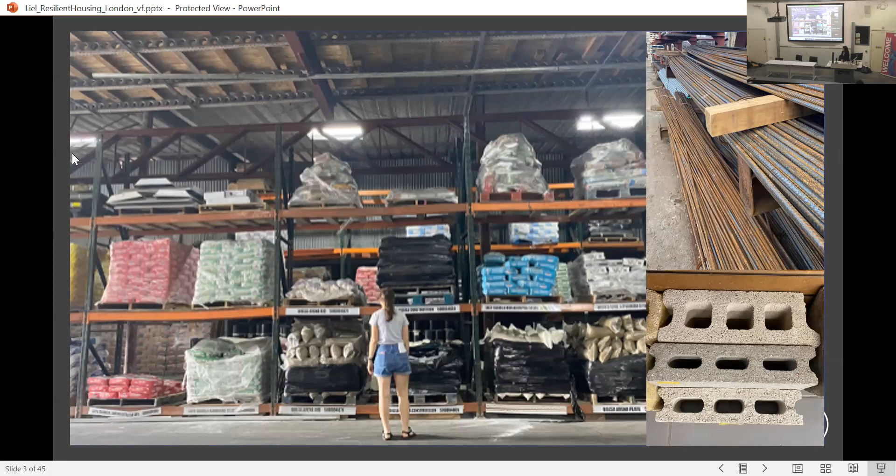There's also wide variation in material properties. This is a hardware store in Puerto Rico, which I'm going to talk about in this presentation, but there's lots of variation in what you can find, what you can build with. As a result, no two houses are the same. So in order to think about disaster resilient housing globally or across a community, we have to be able to deal with these uncertainties in what's there and how it's been built.

Housing is also probably the least disaster resilient form of infrastructure. We have lots of problems with infrastructure and disaster resilience, and housing is very problematic. Millions of people every year lose their houses and are displaced due to disasters - earthquakes, climate related things, other things.

This is a picture again from Puerto Rico. The roof was lost in Hurricane Maria - I'll get to a history of Puerto Rico in a second, but that was in 2017. The building was then red tagged - that's what the red X means - in the early 2020 earthquake. So you can see there's a recovery challenge here, where the roof had not been repaired at the time the earthquake happened. This picture was taken in February 2020, and this home was vulnerable both to hurricanes and earthquakes.

This is the problem we want to take on. This is not a good outcome for individuals, it's not a good outcome for the community. So what can we do about this very tricky problem of houses that do not perform well in earthquakes and other events?

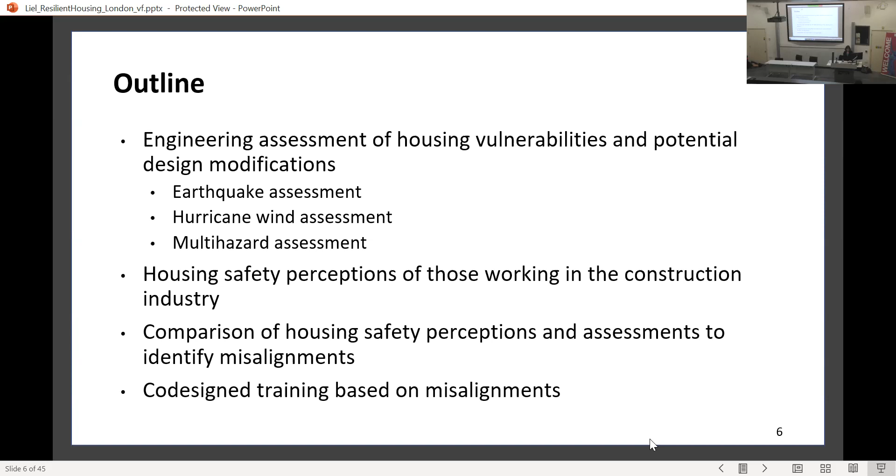Just quickly to acknowledge that the work I'm going to present is the work of a team involving multiple colleagues, a group of amazing students, undergraduate and graduate, and we have been working all over the world. I'm going to present work today on Puerto Rico, but I'm happy to be the voice presenting the amazing work of all of these people.

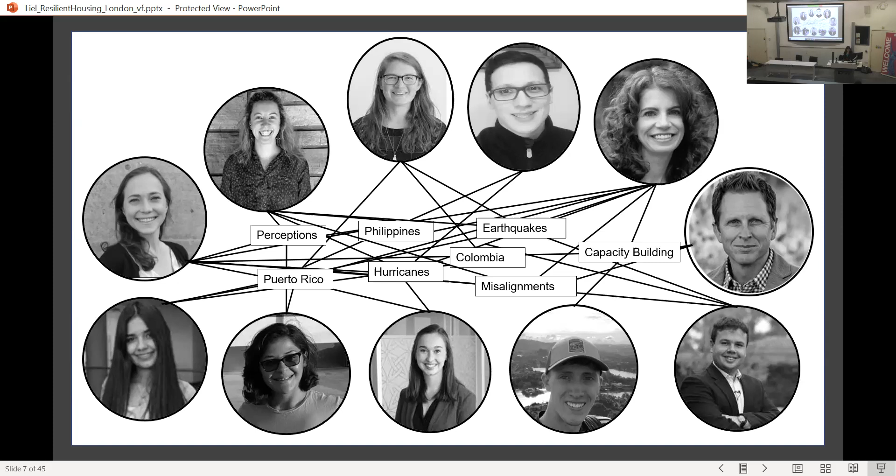Puerto Rico is an American island in the Caribbean. It's technically a territory, which means it has a complicated relationship with the rest of the U.S. It was damaged by Hurricanes Irma and Maria in 2017, which occurred in quick succession in September and damaged more than 1 million houses, about a third of the total houses on the island. Puerto Rico was also extremely damaged by Hurricane Fiona, which hit in September of this year.

So this is a hurricane-prone region, and that's one of the important pieces of context for Puerto Rico. They also experienced in 2019 and 2020 their first major earthquake since 1918, which damaged and destroyed over 10,000 houses. If your Caribbean geography isn't awesome, it's not that far from Haiti and other islands in the Caribbean that have very high seismicity.

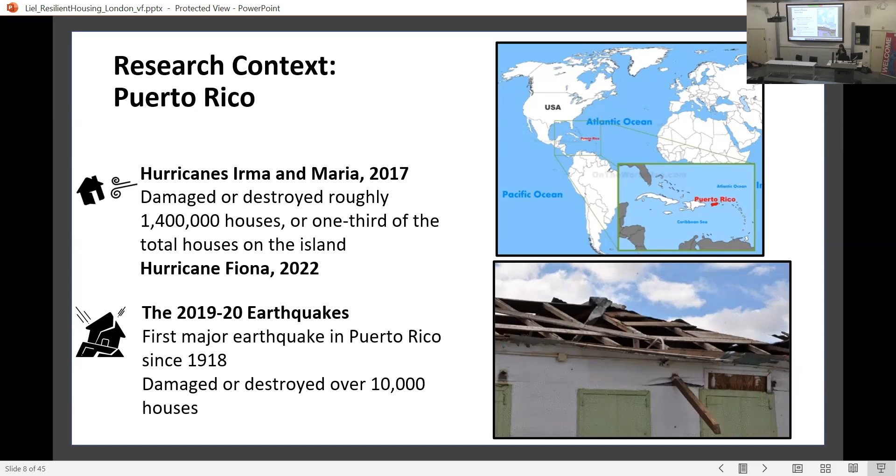Let's start with the engineering side of things. Actually, let me go back for one second. Other context for Puerto Rico: the island has a lot of debt, complicated economic situations, and employment issues. There's a lot of unemployment and a lot of out-migration to the mainland United States. All these things are contributing together to challenges around housing and safe disaster resilience.

As promised, I'm going to start with the engineering, and I'll start with reinforced concrete houses. Here are three pictures of reinforced concrete houses in Puerto Rico. They are mostly reinforced concrete frames with concrete blocks, usually built as infill. They are one or two stories and typically built so they can be expanded upwards in the future.

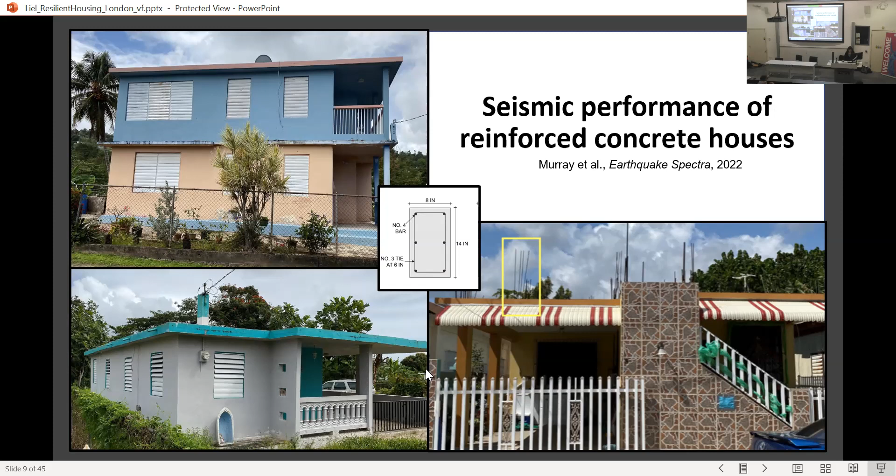It's easy to find pictures that look basically like this. The spacing between columns is pretty similar, and everybody uses concrete blocks from the same manufacturer. So even though there's a lot of variation in what they look like, overall it's not that much variation compared to houses in terms of engineering details. And of course, they're not really engineered - they're built by community members usually, and they have typical dimensions. Apologies for the American dimensions, but that's how we still build.

So what we did is create a list, or a set, of 50 archetype reinforced concrete houses. The student who worked on this was Pauline Murray - she's now a postdoc at University of Alaska. We created models of 50 different houses, and the variations looked at cases that varied in terms of concrete strength.

This is an environment where there's a wheelbarrow of sand, and things are mixed by hand generally. So there's wide variation in concrete strength, and it's probably low. We looked at variation in how many reinforcing bars, the transverse reinforcement, the thickness of the slab. It's very common to put pipes in your columns, so that's what the cross section one is. We looked at the effect of rebar corrosion in a very salty environment left exposed for a long time, and we also looked at the effect of retrofit.

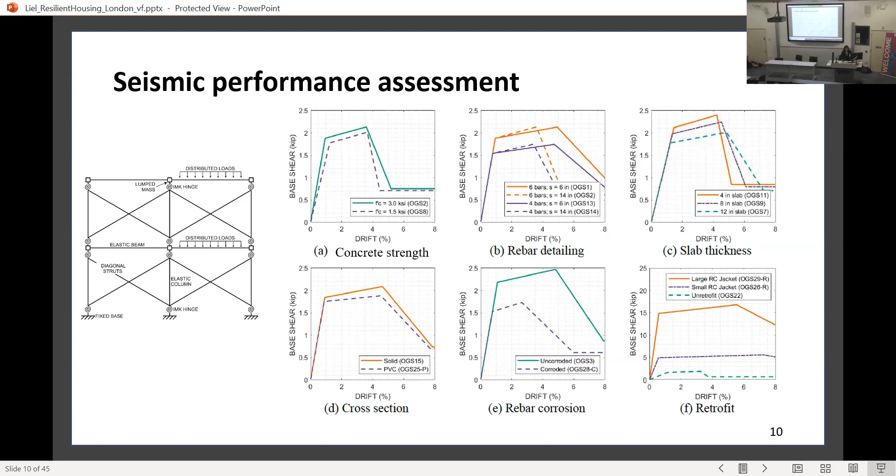For each of these, we created a nonlinear simulation model using OpenSees, and then assessed the performance of these houses. To do the assessment, we did incremental dynamic analysis - we have a set of ground motions, and we scaled those ground motions up and up until something happened. The primary metric I'm going to use today is a collapse fragility, shown on the right here: probability of collapse as a function of ground motion intensity.

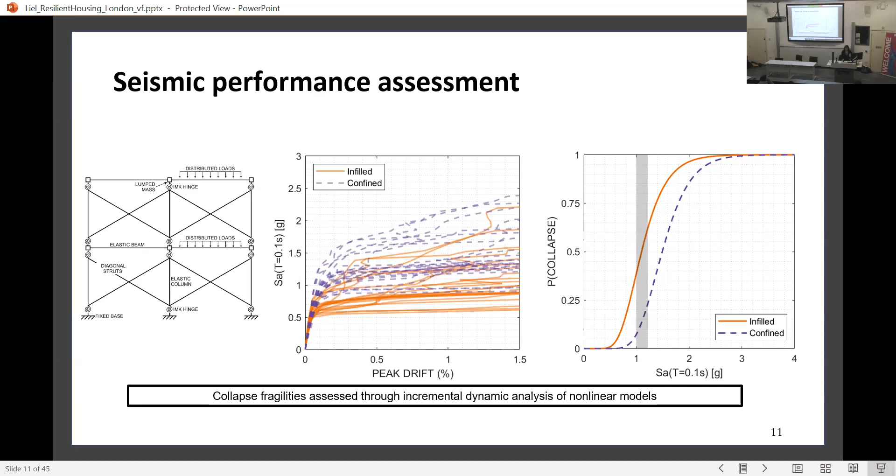One of our findings was that these open ground story houses are the most vulnerable. On the right is all of the collapse fragilities we generated for all the cases we looked at. The ones with this open ground story are shown in orange, and those are the most vulnerable. This is completely consistent with damage in the earthquakes from a couple years ago, where we find that buildings with these relatively spindly, not very well reinforced columns, and a rigid block on top, saw quite a bit of damage.

So the first thing is that these houses are going to present a particular challenge in an earthquake environment. Now obviously there's a reason people build this way in Puerto Rico - partially to park your car underneath, but partially because they have a fairly big flood risk. We'll come back to that in a second. The solution cannot necessarily be to not build an open ground story.

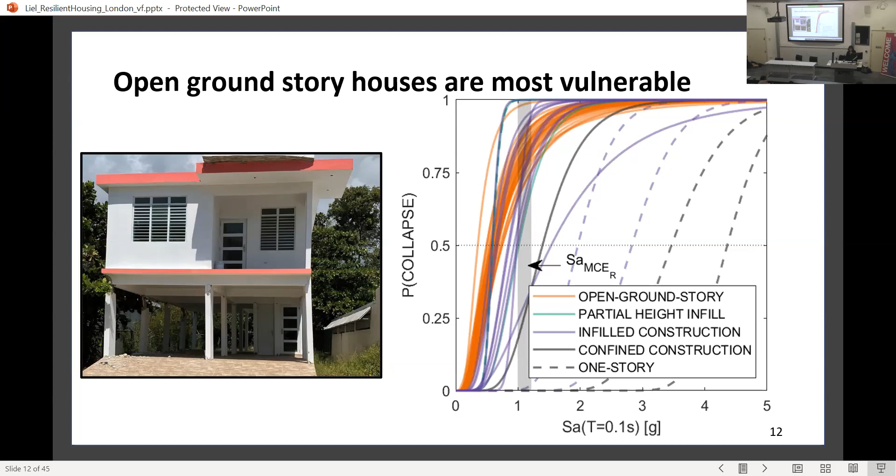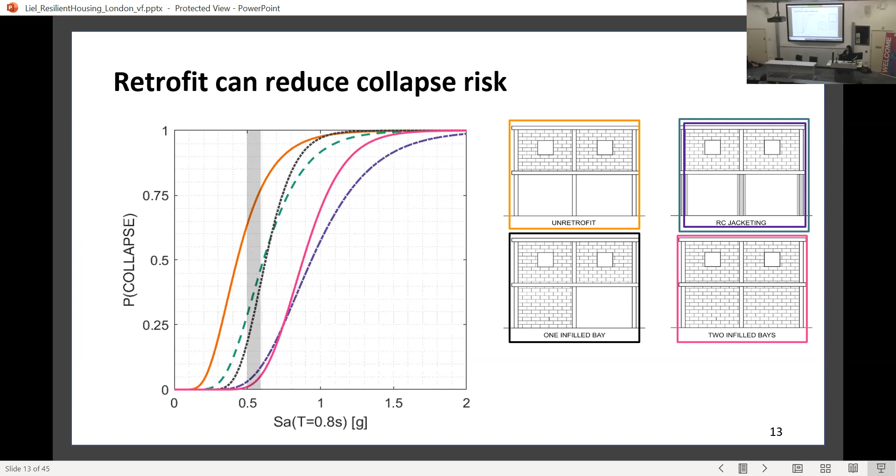So one of the things we showed is that there are practical retrofit strategies or new design strategies that can significantly reduce the risk. Those collapse fragility curves are shifting to the right, so lower probabilities of collapse.

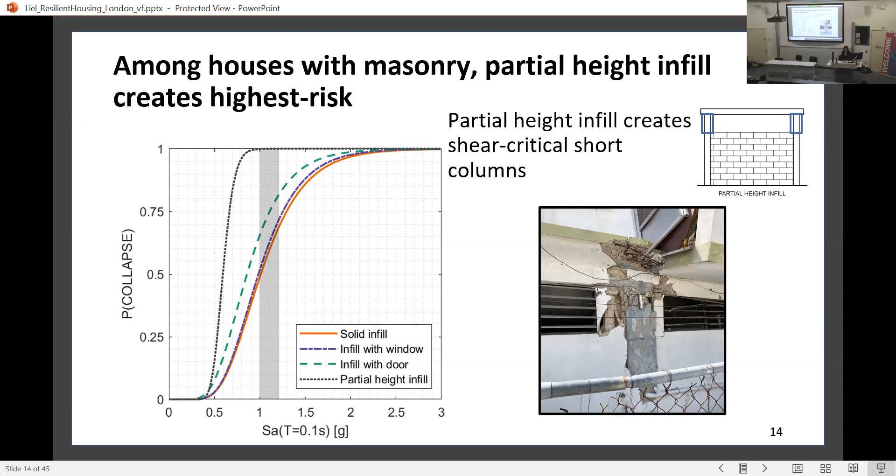We also looked at other cases where there's a window or a door. Those do not have the same kind of negative effect or to the same extent as the partial height infill. We also looked at comparing confined masonry and infill.

In confined masonry, the blocks are placed first and the frame is built around those blocks, and the whole thing acts more as a unit. In the infill case, which is the more common case in Puerto Rico, the frame and the blocks fight together, creating all kinds of nasty brittle failure modes in both the wall and the frame. So we do see an improvement in the confined case relative to the infill case.

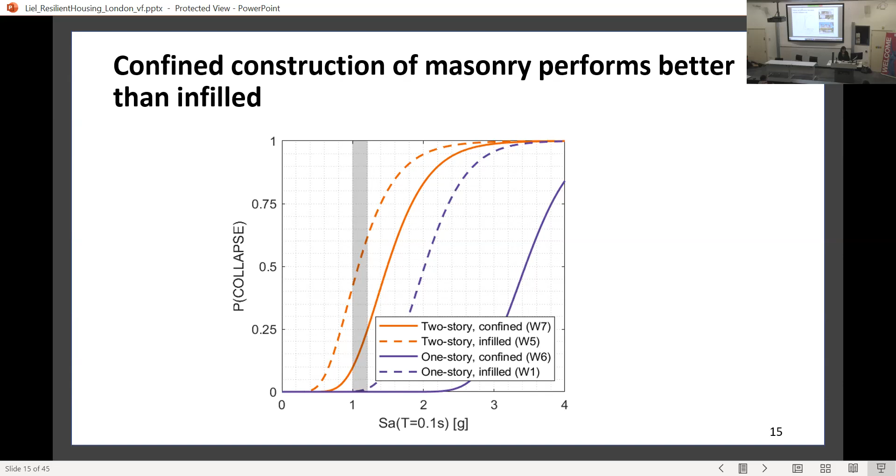So this is starting to show some potential opportunities of ways we could think about having safer housing. We also found—this is going to be really obvious for the engineers in the audience, but I'll give you a reason for stating it—more mass makes your earthquake problem worse. In cases where your infrastructure is engineered, when you have more mass, you design something to be stronger. In cases where it is not engineered, more mass just means worse.

So what happens is that people put these hefty slabs—some are like 4 inches, a third of a foot, some are as much as a foot deep. There's a huge difference in what we think the performance is based on how deep they decide to make their floor slab. So we see these important differences in what people do at the second story in terms of the overall performance of their housing.

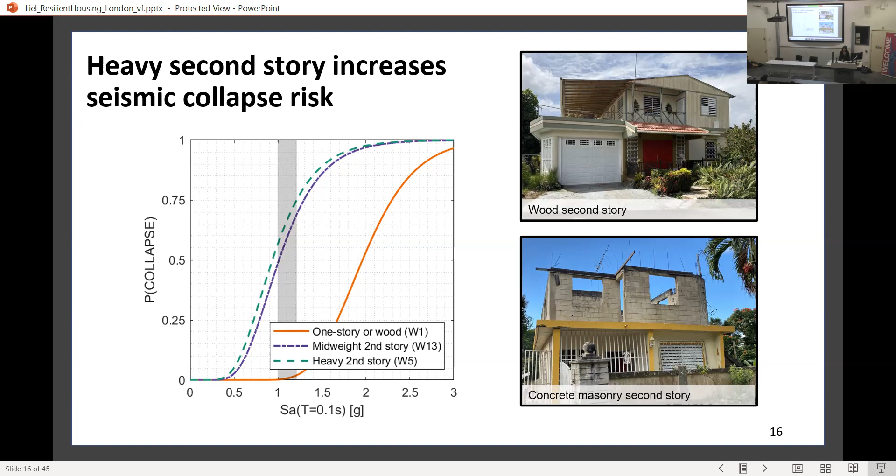Okay, so that's earthquakes. I'm going to take a journey now through hurricane risk for a second. The most common roof type is a wood frame roof with metal panels in Puerto Rico, and that can be either on a wood frame house or on a concrete house. There are some cases of concrete houses with concrete roofs, but we didn't look at those. So you see we have kind of truss systems, purlins, and these panels.

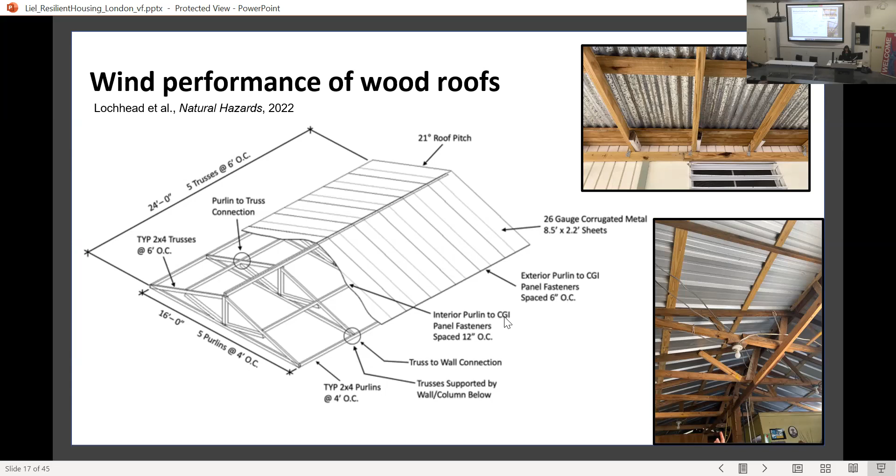So we looked at the performance of these kinds of roofs, again looking at a variety of different cases that represent the types of roofs we saw when doing field work in Puerto Rico and based on our community partners' input. The first thing we found is that the typical construction is not performing very well. We know this from Hurricane Maria, we know it from Hurricane Fiona, but our analysis model also suggests that in a Category 1 storm, a lot of these roofs are going to fail. This is problematic, given that there are frequent hurricanes in this part of the world, and these houses are not prepared—not even talking about category 3, 4, 5.

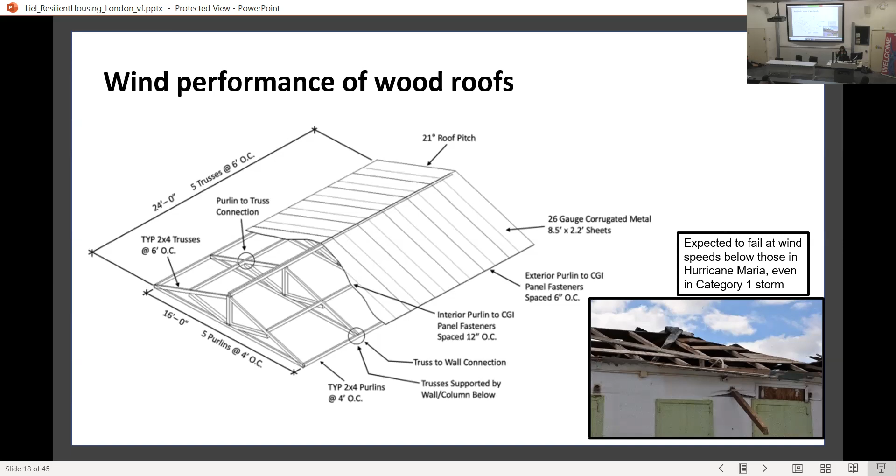We're talking about there's potential for serious damage in even a category 1 storm. The most predominant failure mode in the analysis, and as observed, is the panel lifting off of the roof structure. So we asked ourselves, what can you do to prevent that panel from lifting off?

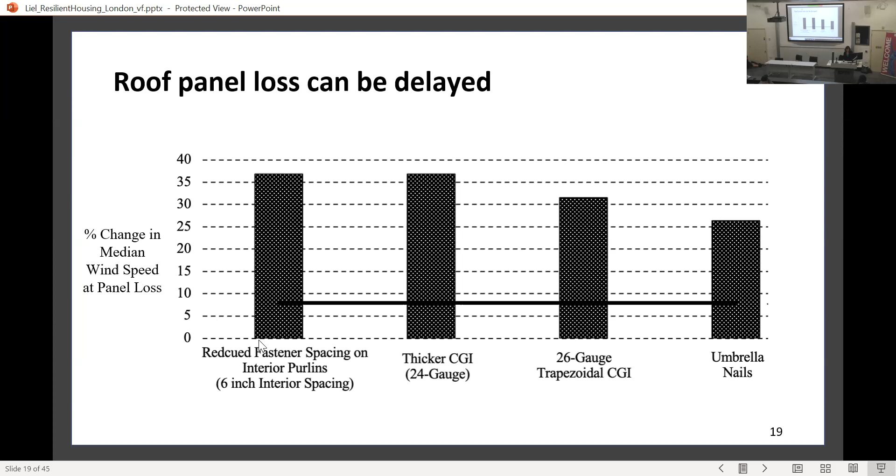We also looked at, if you can prevent your panels from being lost, then what happens next? Either the roof structure comes apart or the roof comes off the entire house—so it either fails at the connections within the roof, or at the connections between the roof and the house.

We saw that hurricane straps can be very effective at preventing that, basically increasing the wind speed at which that failure becomes likely. In our analysis we looked at hurricane straps both within the truss structure and also between the truss structures and the walls, and the effectiveness of both.

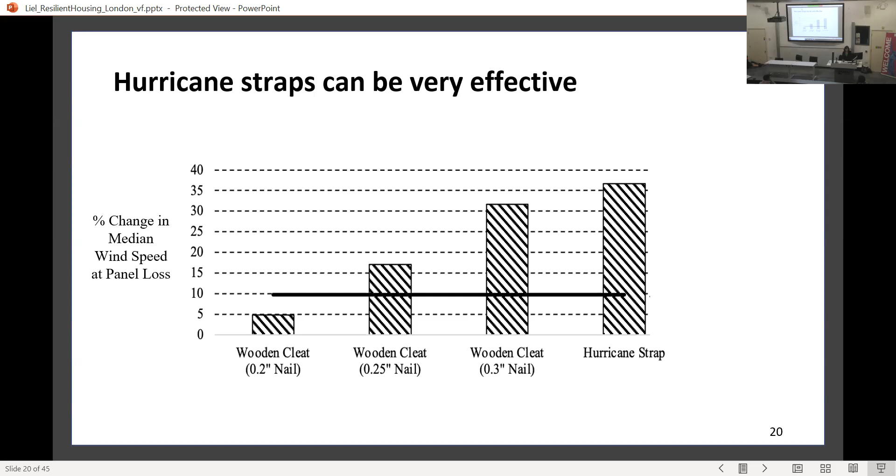But there's also a really important message here about systems thinking, which will come up when I talk about our survey and the perceptions of people working in the construction industry. To illustrate this, I'm going to take a journey to the Philippines, because I think this picture really nicely illustrates one of the challenges we have here.

The picture on the left is of a house built after Typhoon Yolanda. It was built by a major aid organization, which I'm not going to name—they built thousands of these. They were also worried about roof panels being lost, so they made an awesome roof: the fasteners are close together, it's a hip shape rather than a gable shape, and there are extra layers securing the panels. They made this awesome roof because they were worried about what happened in Typhoon Yolanda, and they were responding to that.

Now, what happened in these pictures is from a hurricane in the same part of the Philippines around Christmas 2019; they were taken in January 2020. They didn't strengthen the walls. A common form of housing construction in the Philippines is woven bamboo walls, so they made the roof so strong that it produced a failure in the walls instead.

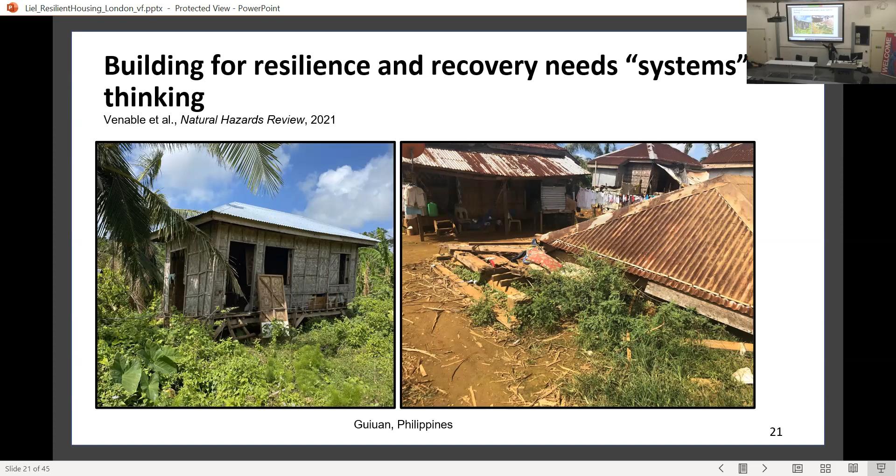Now, would you rather lose one panel off your house, or have the whole thing pancaked down? This is an example of a set of engineering judgments—not entirely illogical—that led to actually a much worse outcome for community members. In our field work we saw probably 60 houses that looked like this, and we weren't even being systematic about counting them, so I'm sure there were more.

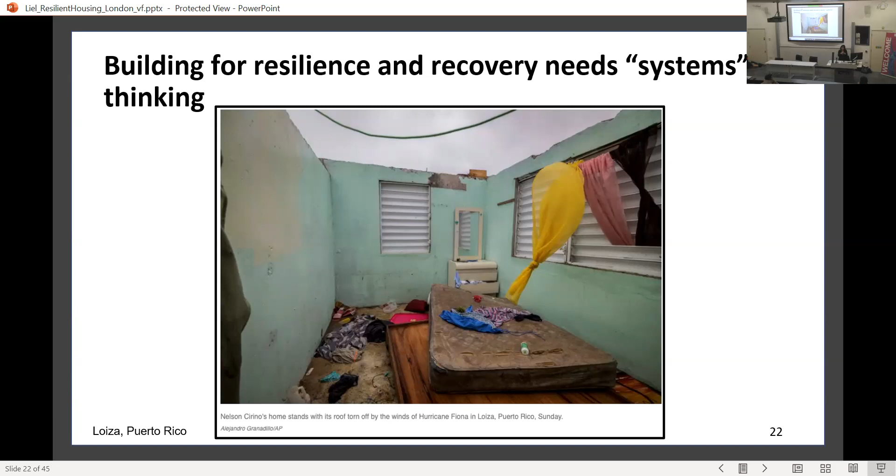Returning now to Puerto Rico, this is a picture from the New York Times after Hurricane Fiona in September. Here is a case of somebody who lost not a single panel—which is a problem, but not as devastating as what happened to this guy, named Nelson, who lost the entire roof off his house. So you have to be careful about over-strengthening one part, because it can have implications elsewhere, which creates a challenge for how we think about building and improving disaster resilience.

The last thing I want to point out is that there is a real set of trade-offs between hurricane and earthquake performance and risk in places that have both. One of the guys we interviewed called this the dilemma of the tropics. He said, I can build my house like that, and it's great in a hurricane and terrible in an earthquake. I can build my house like this, and maybe I'm going to have problems in one or the other.

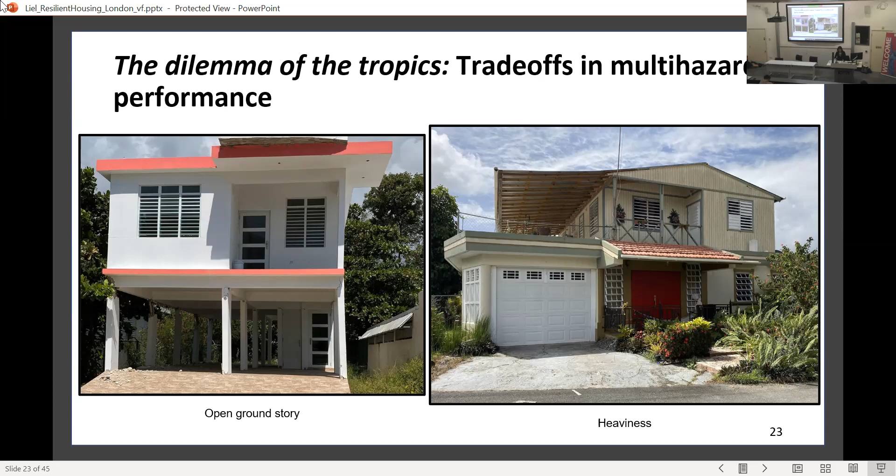So two things we really focused on were open ground stories, which are in part built to help with flooding concerns, and the fact that those are the most vulnerable in earthquakes. And then I talked about how heavy is bad in earthquakes, but people have learned over annual hurricane seasons that heavy roofs perform better, and they do perform better in wind events. So we have this problem where they perform worse in earthquakes.

In parallel to those engineering assessments, we did a bunch of interviews, and then we used those interviews to create a survey that we administered to 350 people. All of them are people who either worked in the building construction industry directly or who work at hardware stores. Hardware stores are the primary source of building information for people who are building on their own. So the people we interviewed were either people who are actually building stuff or people who are telling other people what to build. We pretty much visited every hardware store on the island of Puerto Rico.

We asked some questions about who they are, but in terms of understanding their safety perceptions, we focused on disaster experience, construction experience, expected housing damage, mitigation measures, and unsafe construction practices. I'm just going to show you a few of these results.

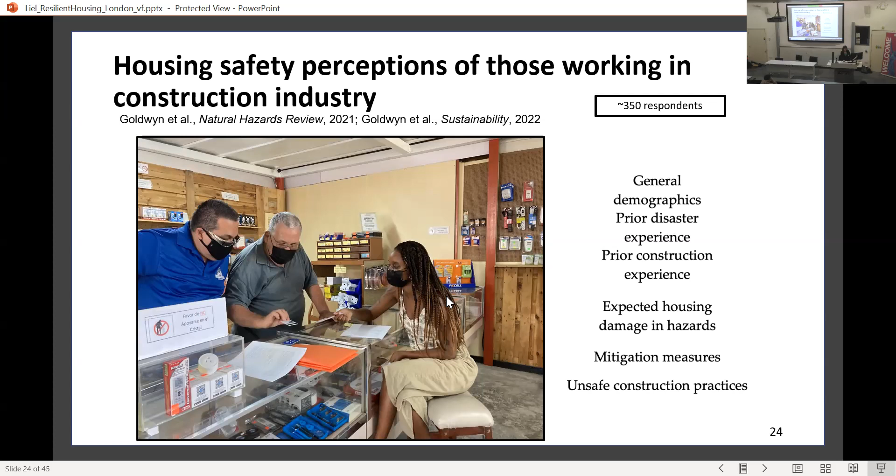There are a lot of questions and a lot of results, but one of the things we found is that those who have more hands-on construction experience, relative to those who are giving advice at the hardware store, had more nuanced perceptions of housing safety. So the people with construction experience are in the blue color, and those without are in the black color, and you see that the people without had kind of a catastrophic view.

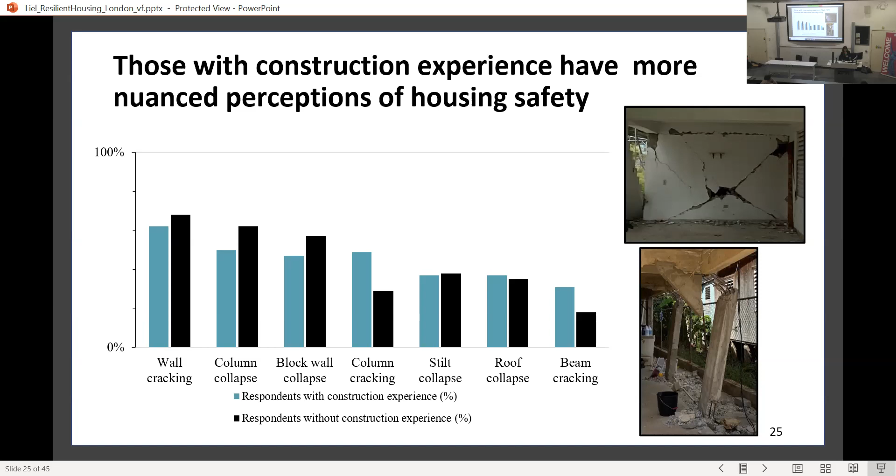They weren't that interested in cracking. They were like, it's all gone, the whole thing is collapsing, the column is collapsing, the wall is collapsing, the roof is collapsing. People with construction experience had a somewhat more nuanced approach. This matters because when thinking about what you're going to fix or do differently next time, if you have this all-or-nothing approach, it doesn't necessarily send you on the right track in terms of what you might do better next time.

We also found that people have a lot of knowledge about what to do with hurricanes. A lot of people talked to us about using tensioners on a roof, a practice of basically putting cables on your roofs. They talked a lot about adding more nails and screws along the edges of the panel, which is much better if you add those on the edge. They talked about using thicker panels and thicker structural members. They also talked about hurricane straps, about 45% of our respondents talked about using hurricane straps for hurricanes.

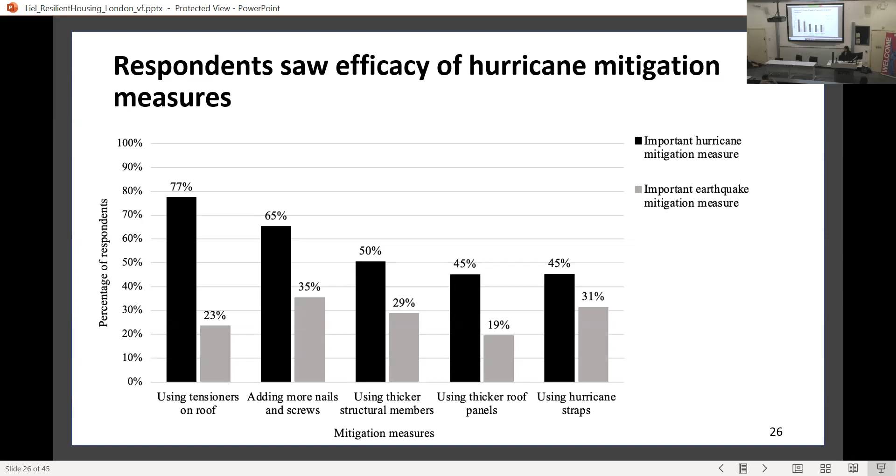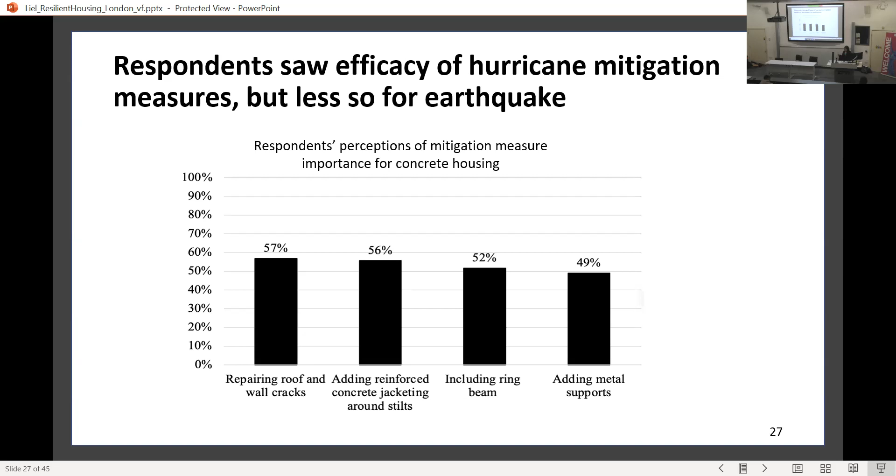People told us this too. They said, look, I would love to know what to do, I don't know what to do, so what should I do to help? We also asked about unsafe construction practices. We asked them what unsafe construction practices do you see other people using, and then for those unsafe construction practices that you've identified, what is the reason that people are using those unsafe practices?

The important thing here is to compare the dark blue one and the light blue one. The light blue one is financial constraints - that's I don't have enough money, or they don't have enough money to do the right thing or the safe thing.

People did choose that option, but in most of the cases we looked at - some of the unsafe construction practices - our respondents were more likely to choose technical construction. So this is starting to point at an opportunity. Yes, resources are limited in Puerto Rico, and very limited in other places in the world too, but in fact, a lot of the reasons people are not doing these things is not entirely resource-based.

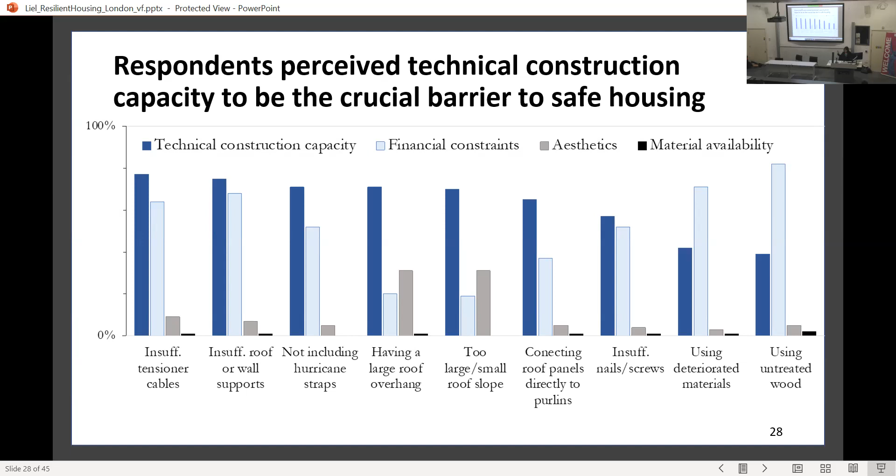So there's a place for information and for engineering here. So then what we did is we had the survey of 350 people telling us what they thought was bad in hurricanes and earthquakes. We had our engineering assessments telling us what engineering judgment thinks is bad in hurricanes and earthquakes. And then we identified places where those were not aligned.

So what we did was we looked at places where the people participating said that practice is safe and we thought it was unsafe, or cases where we thought it was really, really good and they only thought it was kind of good. So even cases like that, we could potentially identify as not aligned.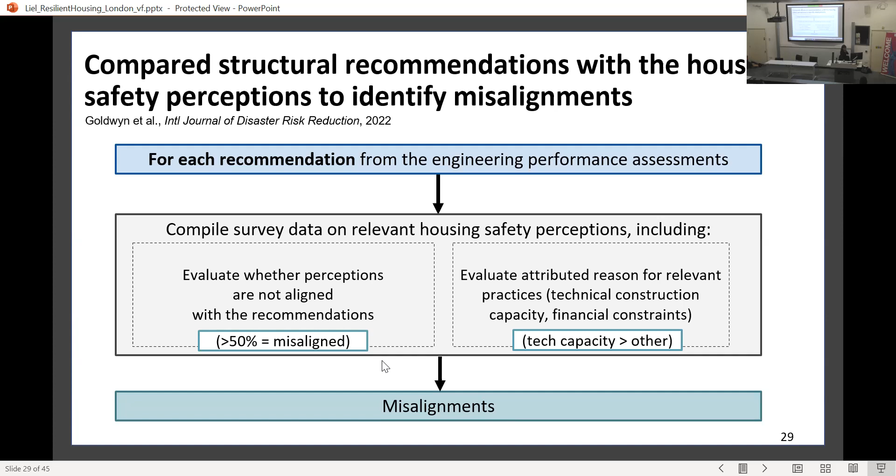We only looked at those cases where the technical capacity was the primary variable. So we kind of took out the things that everybody said was resource limited - we didn't focus on those. We focused on things where there was a misalignment between engineering and the survey, and technical capacity was important. So here's some examples.

Builders prioritize securing panels rather than roof connections. So we asked a question about expected damage in a future hurricane like Maria - you'll see that's on the bottom here. You'll see that most people said the panels will be torn off, and fewer people thought about that truss to wall connection or the purlin to truss failure.

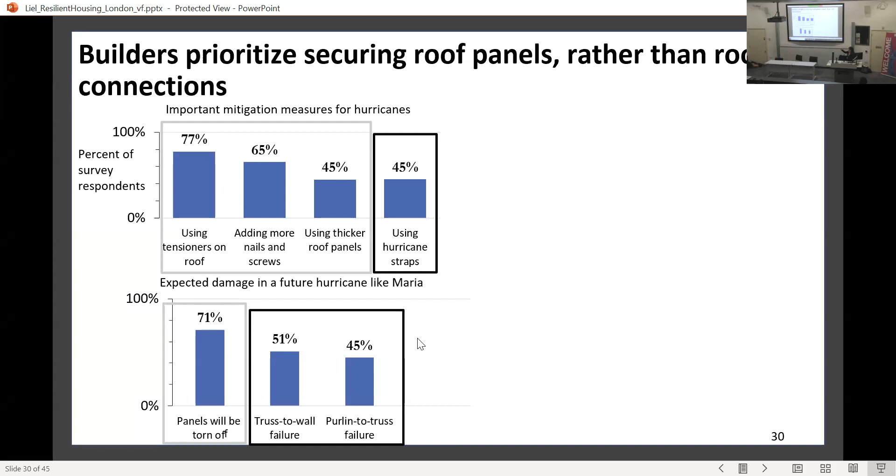Even though we know in fact that some of these failures have occurred, and we also know that in our analysis, if we strengthen the panel too much, this happens. So not very many people worrying about that. We also asked about important mitigation measures for hurricanes, and only 45% of people chose hurricane straps - instead they were talking about adding more nails and screws and things like this.

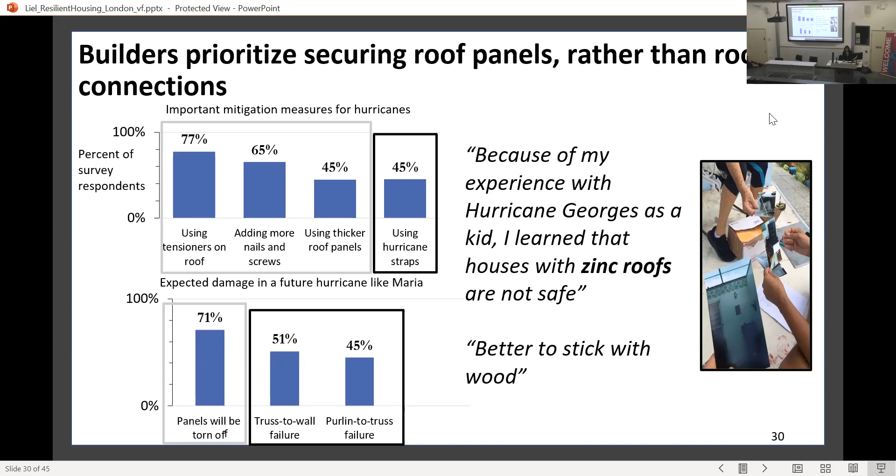And there are deeply held, really important reasons why people think this. We have a lot of quotes, but because of my experience with Hurricane Georges as a kid, I learned that houses with zinc roofs are not safe. A lot of people thought it's better to stick with wood. So that's a reason for not using a hurricane strap because it's not wood - and that's a comfort with a technology that exists and that they kind of know how to use.

71% of people said that they just don't know how to use hurricane straps. 52% said there are financial constraints. Again, I don't want to minimize that there is a financial component here, and I'll talk about what that looks like in a second. But there is this important issue - we do not know what to do and how to build with hurricane straps.

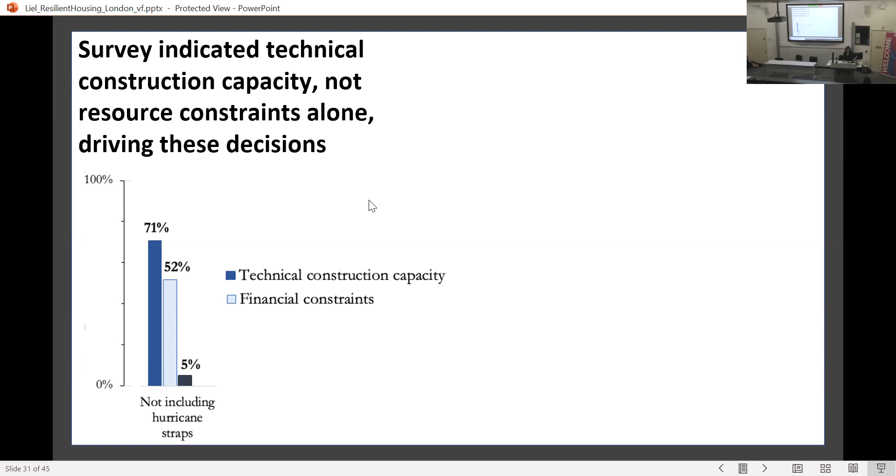And yet on the other side, our wind assessment showed that there's huge benefits of hurricane straps at 2 key locations. And I just want to mention that hurricane straps are widely available - they were available at every hardware store I went in. And so they're there, they're not that expensive - I'll talk about how expensive we think they are in a minute. So there's an opportunity here to try to bring these closer together, the survey and the engineering.

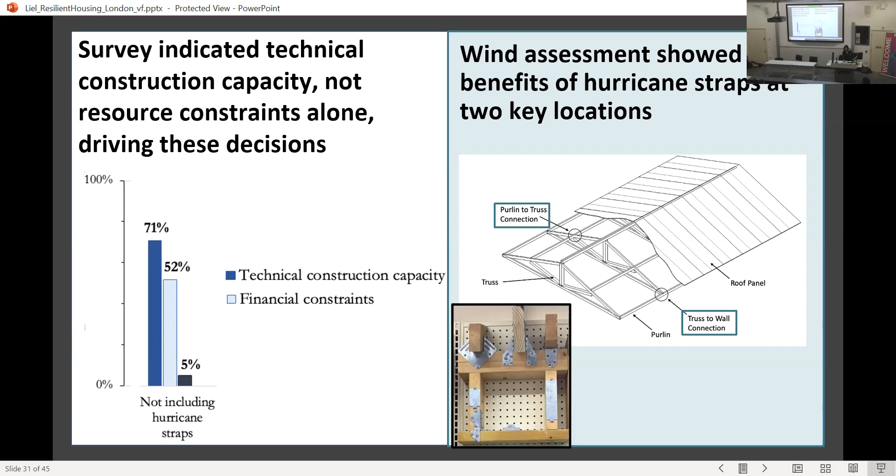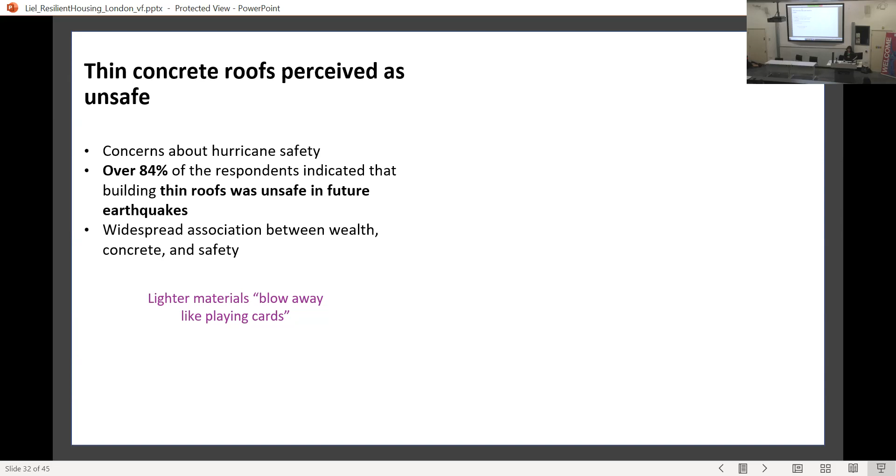We also identified a misalignment in that generally people are super freaked out about thin roofs, because they have seen lighter materials blowing away like playing cards in hurricanes. But the reaction to make a deeper and deeper roof slab, if you're not actually designing the rest of your house - if you're not providing bigger columns and beams - actually creates a significant vulnerability in earthquake that would otherwise not be present.

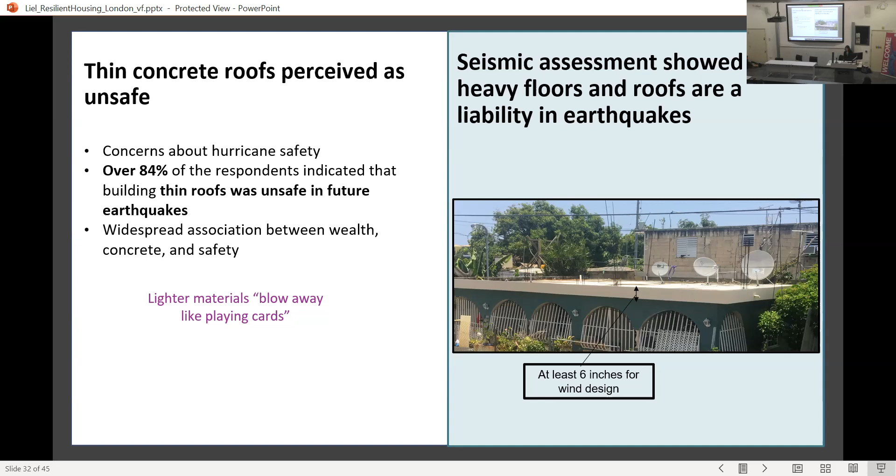These opinions were very strongly held. Everyone who told us the answer to this question said, I know I'm right, despite widely varying but deeply held opinions. One quote: putting the blocks is a little harder, but it makes the columns more convenient for the builder, but not for the client.

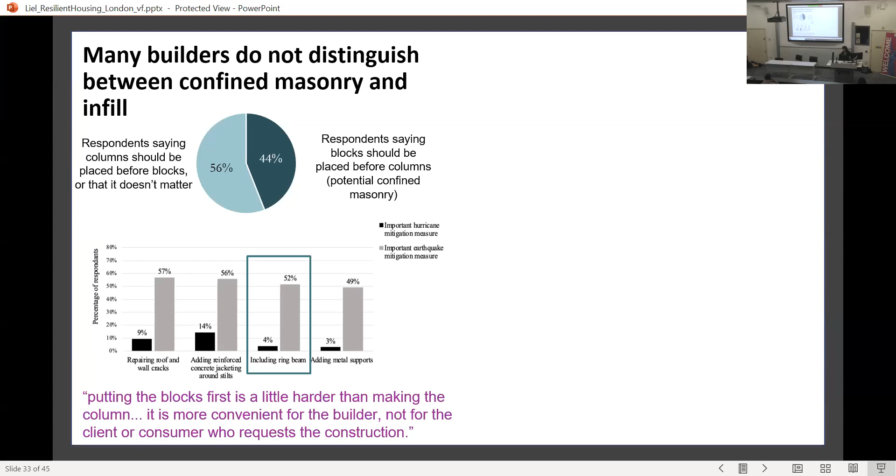Only 52% of our respondents thought that a ring beam was important for an earthquake. We know, in fact, that's an essential part of reinforced concrete construction involving masonry, having that beam along the top. Our seismic assessment showed there's a lot of benefits from building with confined masonry.

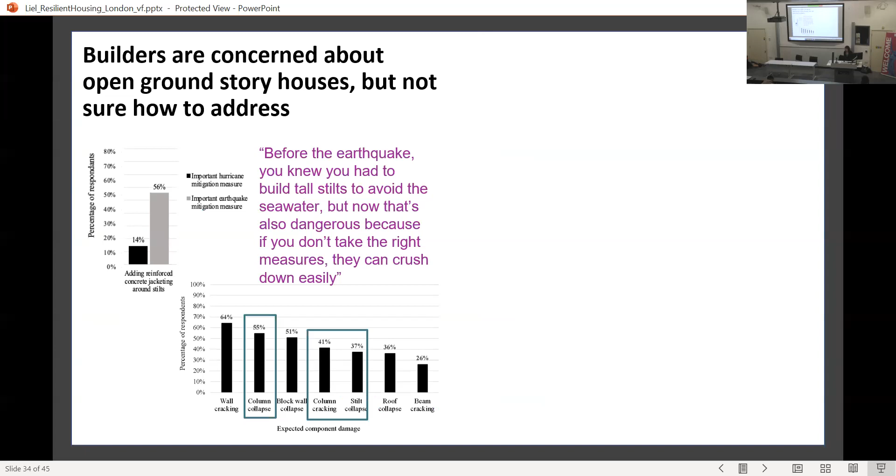We also saw a lot of concern about open ground story houses, but not a lot of clarity on how to address it. One person said: before the earthquake, you knew you had to build tall stilts to avoid the seawater, but now it's also dangerous because if you don't take the right measures, they can crush down easily, and we don't know what those right measures are. There was an acknowledgement that this is risky, and a lack of clarity on how to actually address it.

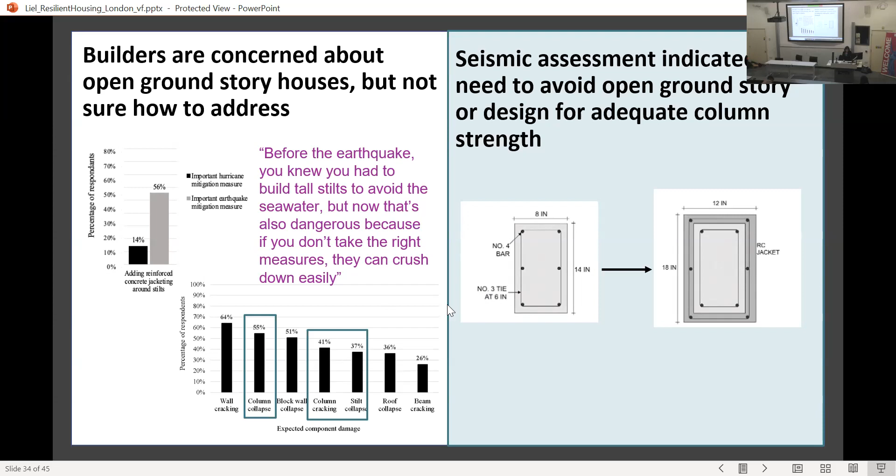Our analysis showed that bigger columns with more reinforcement can in fact mitigate that, so you can have better earthquake performance and still have those tall stilts.

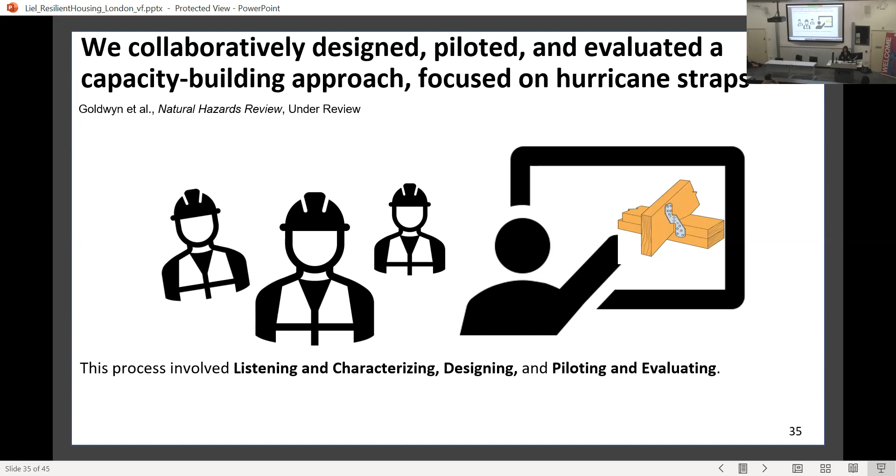Based on that, we collaboratively designed, piloted, and evaluated a capacity building approach focused on hurricane straps. This is ongoing work with community partners to design a training program on how to use hurricane straps correctly. We studied our process of designing that training: listening, characterizing, designing, piloting, evaluating. We put some stuff together, talked to people, changed it, put more stuff together, and looked at how people's views of hurricane straps and how to use them were changing throughout that process.

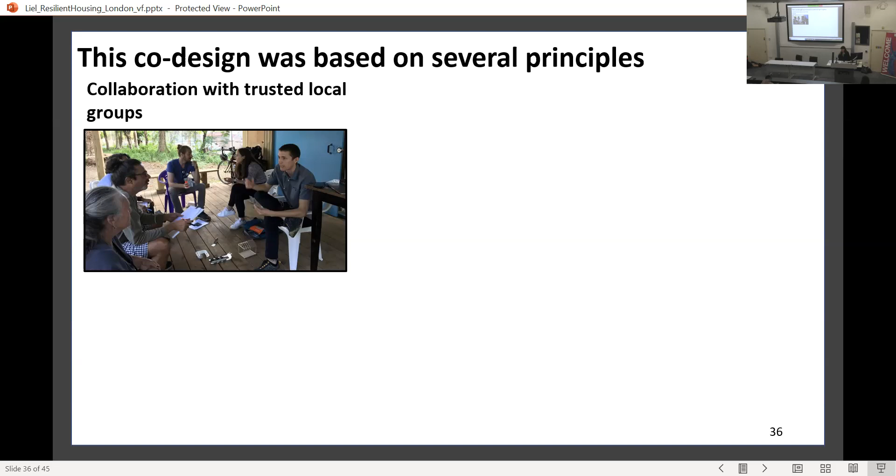The design process we used was based on several principles. First was collaboration with trusted local groups. This is especially important in a situation like Puerto Rico, where there's a lot of concern about outsiders and their motivations and why they might be telling you to do a particular thing. So we worked with local groups who've been training builders and working on building and rebuilding after Hurricane Maria.

We used a combination of PowerPoint lectures and demonstrations, building little model houses. All the interviews were done in Spanish, so the quotes I showed are translated from Spanish to English. We put together some slides and some little model houses, and asked people to try to pull them apart.

We focused everything on a discussion. Even when there was a PowerPoint, it was on a computer, and we passed around handouts. We talked about it, not like I'm doing right now, me talking to you about what you should do. It was like, here's what you could do, what do you think about it, how could we learn from it?

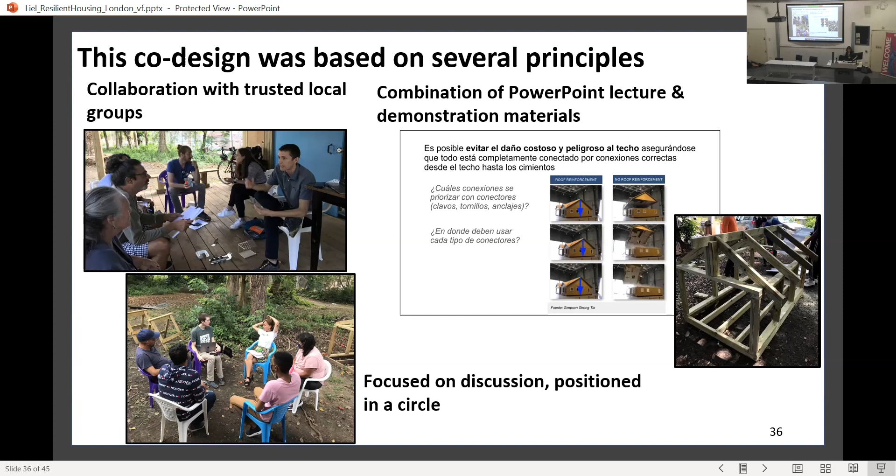Just to illustrate this process: during the training, the people we were talking to expressed their uncertainties and questions, and then we adjusted the training. It kept changing in response to what was needed.

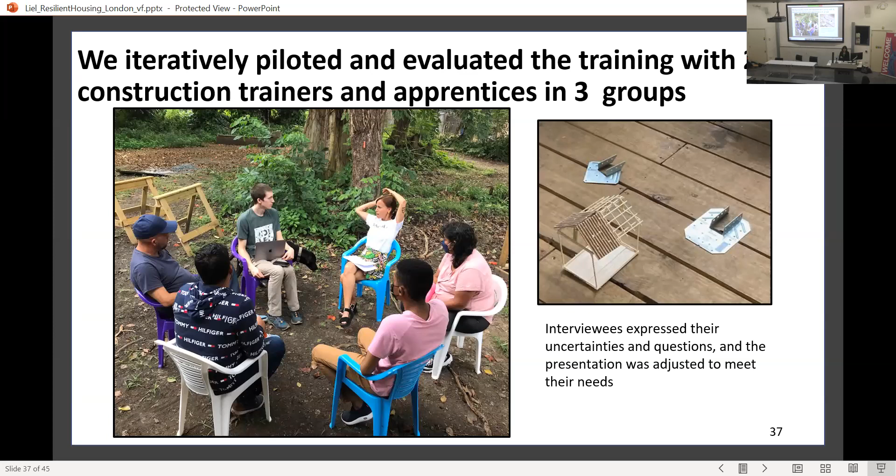I can give you an example of that. We put together all this stuff about hurricane straps, because it's a pretty cheap, pretty available, pretty effective technology. We put together some slides.

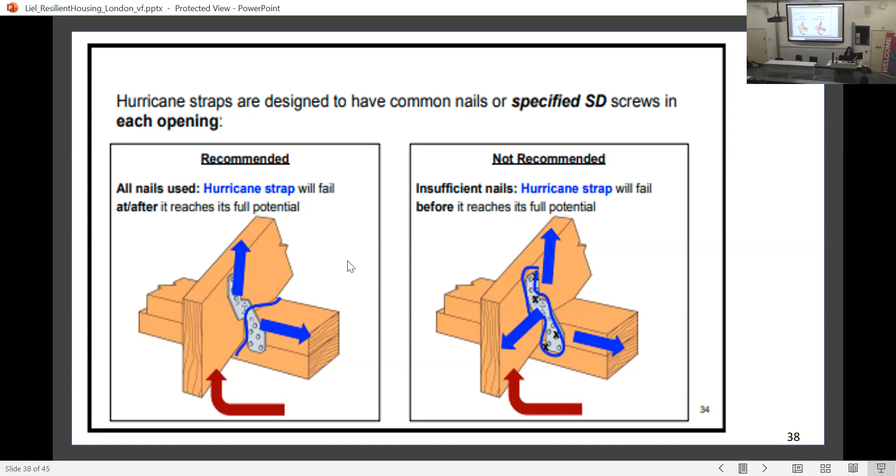The first thing we learned, which we had learned in our survey, was that the typical hurricane strap available there has 4 places to put nails on the top and 4 places on the bottom. In general, people only use 2. We also found that they don't use nails, they use screws. So the technology is developed to be used with 4 nails at top and bottom, but it is in fact generally being used with 2 screws at top and bottom.

Well, so then why, right? What is the logic? So a couple different things. One thing is that they're nervous about wood, so putting more holes is perceived as being worse. We heard that from several people, like, why would I put more holes than I need? If I can secure it with 2, why would I put 4?

There's also a preference for using screws, which I'll talk about in a second, related to building construction. It's just easier to use screws. Now you can use screws, but you have to use specified screws. And in fact, usually they're using deck screws.

They perceive that the major manufacturer, Simpson Strong Tie, is the major seller of hurricane straps in Puerto Rico. They do sell screws intended for hurricane strap use, but they're expensive. So people are mostly using deck screws, and they don't understand that the deck screw does not give you the same safety. Multiple people told us, well, we think Simpson's just trying to charge us more money for their screws, when in fact there is a difference between the screw being marketed for these in terms of its shear strength.

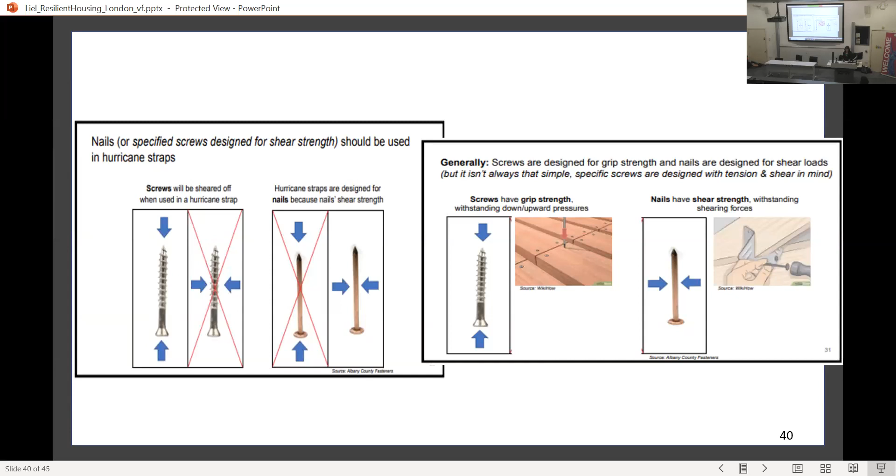Based on that process, we worked with around 20 trainers and builders and 3 different organizations. We looked at 2 different things. So we looked at self-efficacy, which is the perceived ability to take action to change practices and mitigate risk. In looking at how people respond to risk and whether they do something about it, self-efficacy is really important. This is really the sense of, if I do something, does it matter? Me personally, can I do something to solve this problem?

So we found some positive changes in self-efficacy. We heard people talking about, I could do this for $35, I can make sure my roof doesn't blow away. And this again is getting to the cost piece. This is only the materials, but the materials for hurricane straps are not that expensive. Even in a highly resource-constrained environment, $35 relative to other expenses they're putting into their house is potentially manageable.

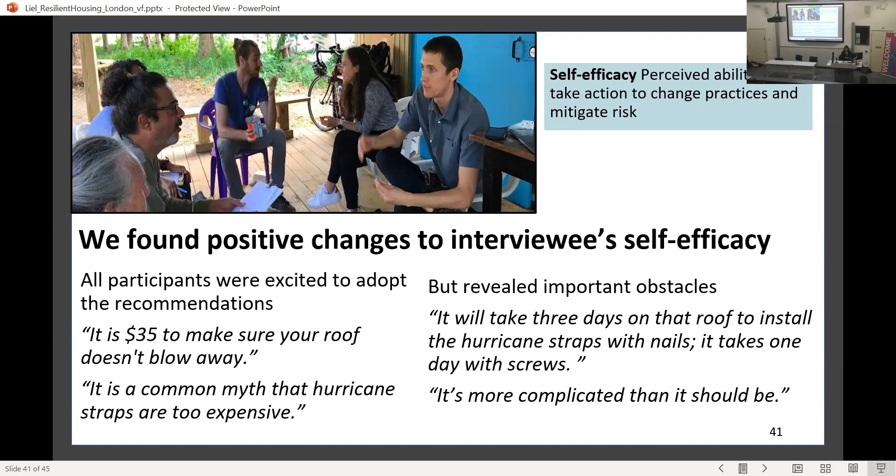The labor is trickier because they aren't that experienced with nails relative to screws. It's a common myth that hurricane straps are too expensive, but then also there are obstacles. It's going to take 3 days to install hurricane straps with nails versus 1 day with screws, and it's more complicated than it needs to be. So that's self-efficacy, that's what can I do.

We also looked at whether they believe that this technology works. We call that knowledge of mitigation measure efficacy. So can I do something, and if I have this technology available, is that a good thing to do, and do I have confidence that it works? We also saw increases in whether people have confidence in hurricane straps as well.

We asked them, we were being fairly professorial about it, in the sense that we looked at Bloom's taxonomy, which is a way of evaluating learning. So we did some measurements of whether they recall the information we presented or talked about. We also asked, what if your friend was building a house and you saw them using 2 screws? What would you say to them, and how would you help them? So we looked at various ways of evaluating learning.

So I would start by explaining how a screw versus a nail reacts differently to different stresses. It's about shear strength, you can bend it like this, demonstrating what shear strength is. A screw will more likely crack under shear pressure.

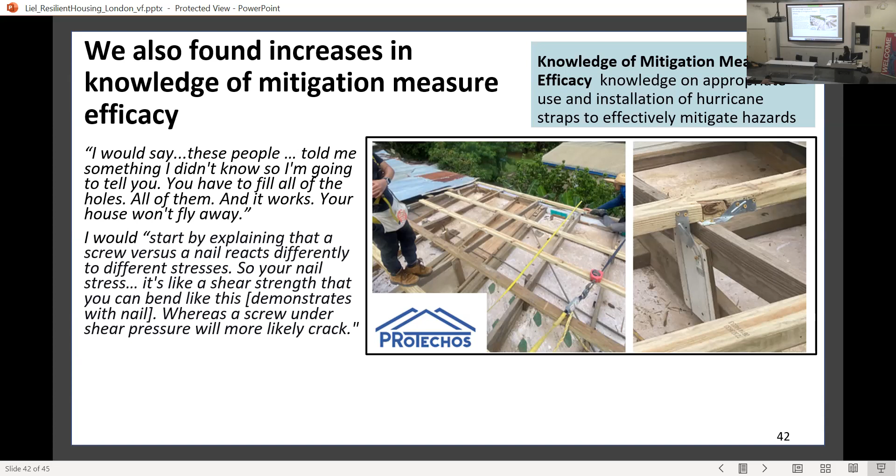Okay, so we are still working on this, furthering partnerships for more training. The groups we were working with were asked to update what they have based on these conversations and send it back to us. One of my PhD students recently went to Puerto Rico just a few weeks ago.

We're developing partnerships with industry. Simpson Strong-Tie, as I mentioned, is basically the primary place you get hurricane straps. We're working with their engineers and local presence to engage them in helping people learn how to use their technology correctly. We're also looking at the screw situation—this is what's commonly used, but those don't work very well.

We're also working on developing more guidance. We're planning to do some tests and take videos—like an Instagram reel of hurricane straps coming apart if you don't fasten them correctly, to really show why you need the 4 fasteners and why nails are better than screws, with some visual evidence.

We're looking at putting together a handbook. There is a lot of information, but the problem is if you go to most hardware stores in Puerto Rico, it's a book this big, this thick, with every product ever sold. In reality, there's only a few that a typical builder really needs. So we're trying to distill that down to how do you know if you need choice 1, 2, or 3, and how to use those effectively, because it's actually really overwhelming how many products they have and how difficult it is to distinguish which is the appropriate one.

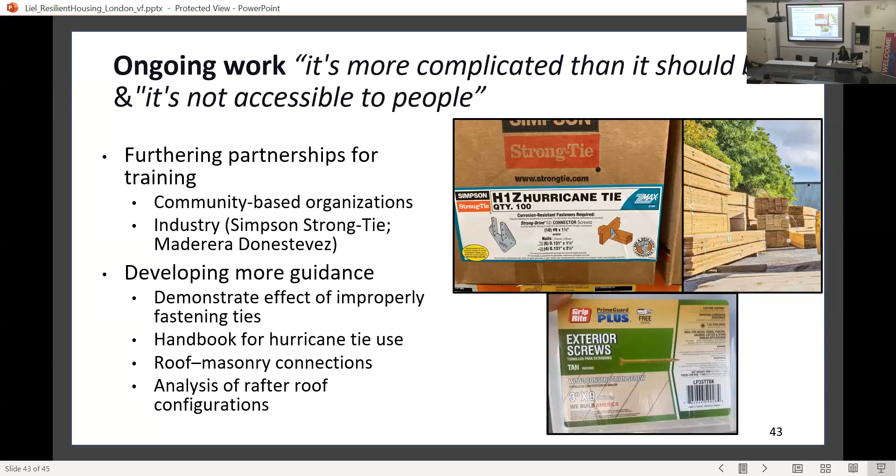So concluding thoughts, I'm returning to Encanto. Housing is vulnerable, right? We see this every time there's a disaster, but there are ways to improve performance, even of this informally constructed housing. I talked about Puerto Rico today, and sometimes when I give this presentation to people who live in the US or Western Europe or the UK, it's easy to think this is not our problem because we don't build like this. I'm from Colorado, we have building codes, more effective building codes in the area.

But I want to encourage you not to think about your house as distinct from these houses. The reality is that our regulatory processes, our design and construction for housing, are widely variable. They are in many cases not as good as for other types of construction. So basically what I'm trying to say is it's a mistake to see this as just a global south problem. Maybe in the extreme it is, but there's this whole range of performance in housing, and we can really learn a lot about making our own houses safer from understanding the challenges here.

I also want to point out, I always get this question—these houses are almost certainly not code compliant. There are building codes in Puerto Rico, but nobody really checks them. If you were to retrofit the columns, for example, on those open ground stories, you probably cannot satisfy the code, but you can satisfy probably the intent of the code, which is protecting life safety. So just think about these complications around building codes and regulation, and whether they're getting in our way or helping us incentivize the right thing.

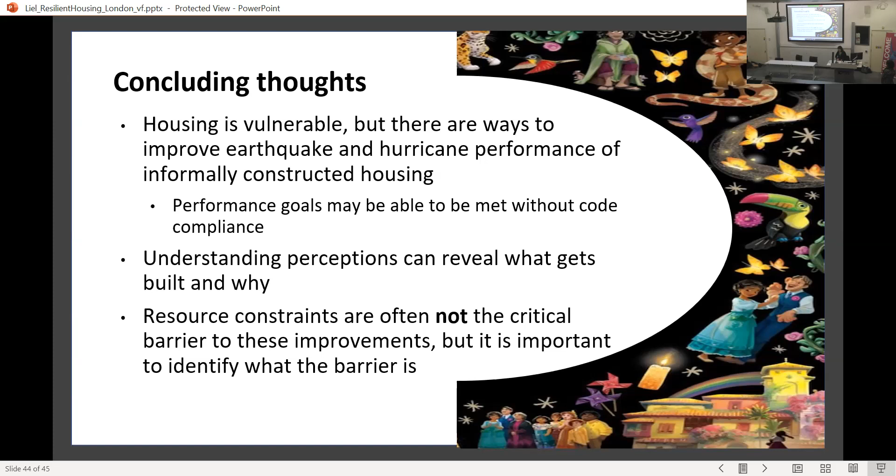But in Puerto Rico, what we found is that resources are not often the most critical barrier, and there's actually a lot that can be done with very small amounts of resources. So it's how can we work on changing building practices in those areas where resources are not the primary constraint. And with that, I'd be happy to take some questions.

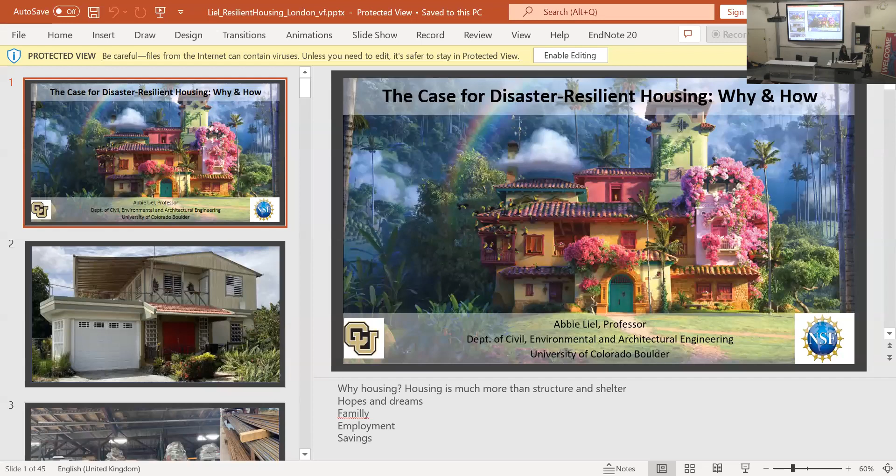Is there any question from the audience? I think you have a question, Karim.

Abbie, thanks a lot, very interesting talk. I'd like to ask about the survey you did with the people. When you asked them about the measures needed to reduce vulnerability against earthquakes or hurricanes, they seemed a bit expert, but then when trying to highlight the problem, they said they don't have enough technical capacity. So in what sense? Are there not enough expert engineers, or is there insufficient knowledge? Could you please elaborate on that?

Yeah, so the people we talk to are experts in the sense that they have done building, they understand what people are buying and what they're doing, and they have opinions about what other people are doing. So the way we phrase those questions is like, what do you see other people doing that you're worried about? What do you think other people are doing that's unsafe? It's more difficult to get people to say what they're doing that might be unsafe, so we asked in that way - like what does Kareem do. The items we asked about were based partly on free entry, but also from interviews we had done before, where we asked, do you think this practice is unsafe? So some of those are things we suggested, like what do you think about a ring beam - that was something we put on the survey and then asked what they thought about it.